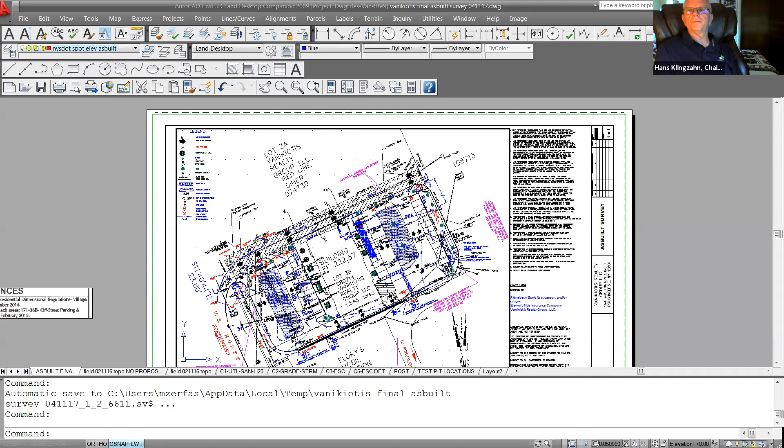Okay, I just had a few questions about the impervious surface. It looks like you're probably going to need a few variances to do this. As the board may recall, both properties had received lot coverage variances as part of their original proposals. And it looks like this is probably increasing some of that because, Joe, you're proposing, I think, 11 parking spaces over on the retail site.

Yes, but we're only adding 700 square feet of impervious surface. Most of the parking is just being proposed where the current parking is, we're just shifting it. We're removing that large walk along the west side of the retail building and making it a smaller, more manageable 5-foot walk. That's just a large area of concrete right now. So by shifting the parking lot east, we could actually even reduce that 700 feet more if we needed to. We just thought in our layout we wanted to keep the maximum separation between the aisles.

Okay, so you are increasing the impervious area slightly then? Yes, 700 square feet. Okay, so we would need a variance to do that because they were already granted a variance. I don't think the lot coverage calculation was on there. So we're going to need to know that information so we know what the variance will be.

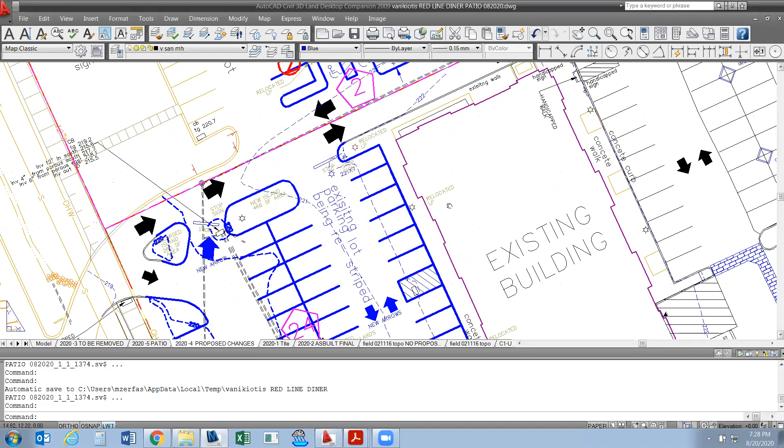So this is the new seating. And where did you say the parking was going? These parking spaces are moving to where, over here? These are the new parking spaces, the 11 that's colored in red. Oh, okay, those are the new spaces. The 24 that's in magenta was shifted to the right, I see, and then creating the 11. Right now, there's a curb line along that.

You'll remember there's a curb line. We're just extending it to the right, and we're adding the parking spaces for the diner over here - the 2, 2, and 2.

Those are done by reclaiming some of the landscaping and just restriping. We're keeping 2 right there, but there's plenty of areas in the back and along the side where we can save that landscaping and move it.

Now we are reclaiming one big area, which is nice, right here in the front. I'm gonna zoom in even bigger. It's called the island, right there at the entrance.

That was previously concrete. We're gonna rip that up and make that a landscape island. So right as you come in, you're gonna see a beautiful landscape island instead of a pile of concrete that's there now. We felt that would be a nice enhancement to the site as you come in off Route 9 - see some flowers.

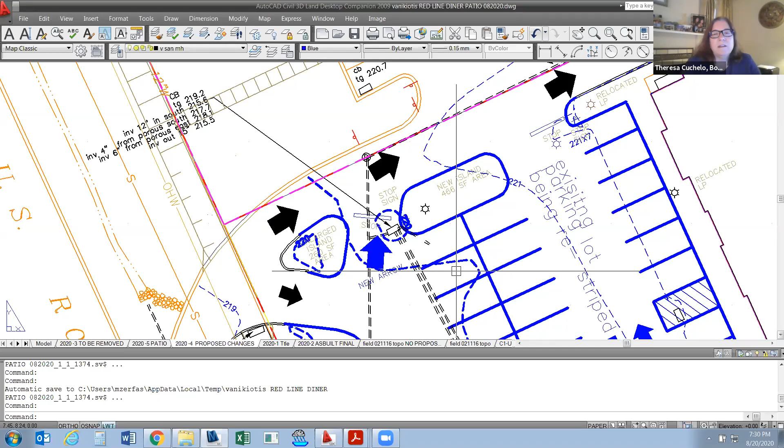Maybe that'll slow people down a bit. Right now it's just dirt laying on top of concrete. I just don't know why it was there, but that's what it was.

Hey Joe, while you have that drawing, would you mind showing them what you're planning on doing with converting the 2-way to 1-way? Where you see the double arrows right there, where the 2 is with the magenta, there's double lanes. That will just become 1 lane.

And right where it says proposed concrete sidewalk, we will install bollards, as the village engineer has suggested, and I agree, to protect the 4-foot walk from the cars.

So now cars will go from west to east through the site coming off Route 9, and they'll have basically 19, 18 feet, because the 20 feet will lose about 2 feet for the bollards - maybe 1 foot for the bollards, but I think I want to be safe and say we have 18 feet for the one-way.

for people to drive through, and we'll put - I'll change this to arrows in one direction only, with a one-way do not enter sign on the other side.

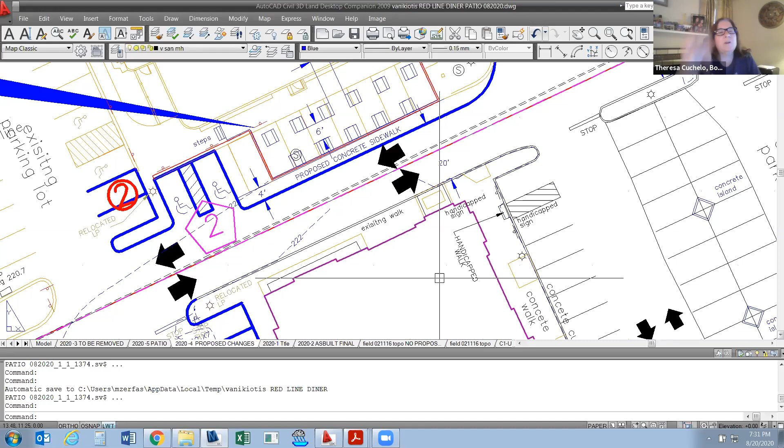Right, so Joe - sorry, let me get my little annotate back. Because then here you'd have to put some kind of... oh no, you wouldn't, because people can go around, never mind. People, as they come in, can turn left or right, north or south

into the two separate parking lots as they need. If they're going to the bank, they continue around. If they are going to the rear parking lots, they travel through, going north or south into the rear parking lots, as they do now.

And as everybody leaves, they drive easterly to the back connector road and go north or south out back to Route 9, because we can't go onto Route 9 from the site anyways, just slip in. So that one-way makes a lot of sense, and it's really not hurting anything.

People coming from the connector road west through that double road - very few people use it. Matter of fact, it's closed right now temporarily for the temporary seating, and it hasn't caused any issues. So that's our proof right there - we have anecdotal proof that closing it for the last couple of months hasn't affected the path.

And we're actually going to improve it from what it is now by providing a west to east flow, which would allow people to either go to the westerly front parking lots or to the rear back parking lots.

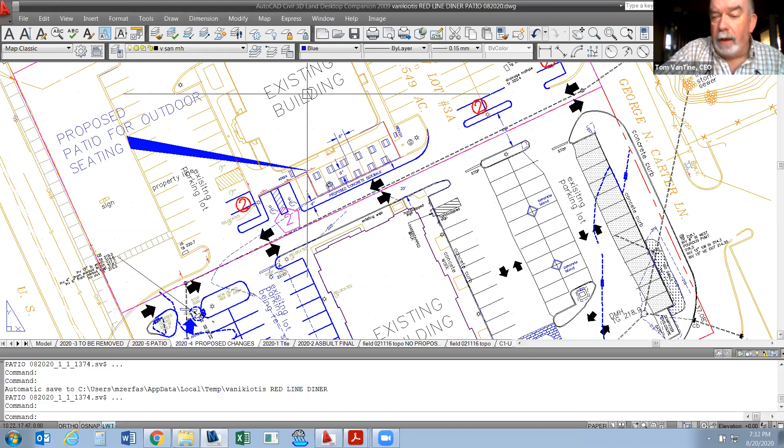Joe, Tom VanTine, go back to the deck for a second. Are you proposing to cover that deck at all? I believe there will be a cover - I'll verify that, and we need to get you information on that.

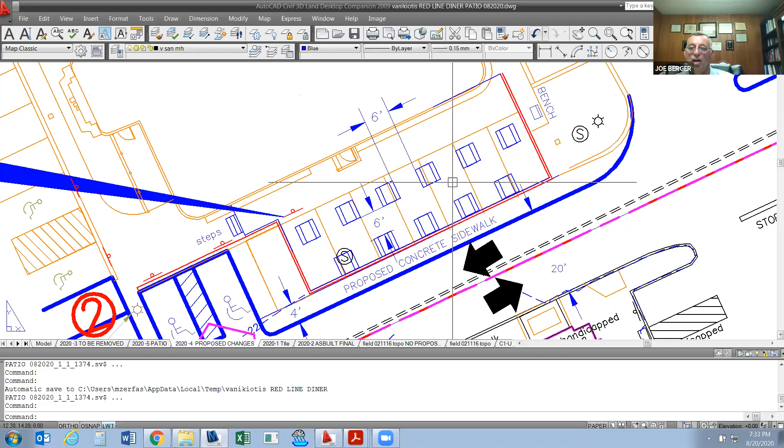Also, what do you anticipate doing as far as water runoff and ice runoff in the wintertime? It will drain down across the sidewalk onto the driveway, and then from there, it's grading - just as it does now - it flows westerly to a catch basin.

I'll just zoom into where that catch basin is. It goes to this catch basin right here - that's where it currently drains. Right now you have it coming down a roof drain, obviously, into the catch basin. We're going to have a free flow off a cover going onto either the walkway or the driveway.

Okay, my concern is in the wintertime when it freezes. Let me think on that - maybe we could collect it and do something. I'll work with you on that. That's a very good concern. I can't give you an exact answer, but we'll solve that problem. How's that? Okay, very good.

Thank you, Joe, it's Victoria speaking. The site plan that we got was fuzzy - the copy was a little bit fuzzy. I wonder why. I mean, I can show you, but the digital copy I received was fuzzy too.

So can you just go over the parking? Is there adequate parking on both lots now? Yeah, the current parking meets code, we're just asking for a few more. Realistically we need a little bit more, but it meets the code. Even with the additional seats? With the additional seats, well, we don't think so, yeah.

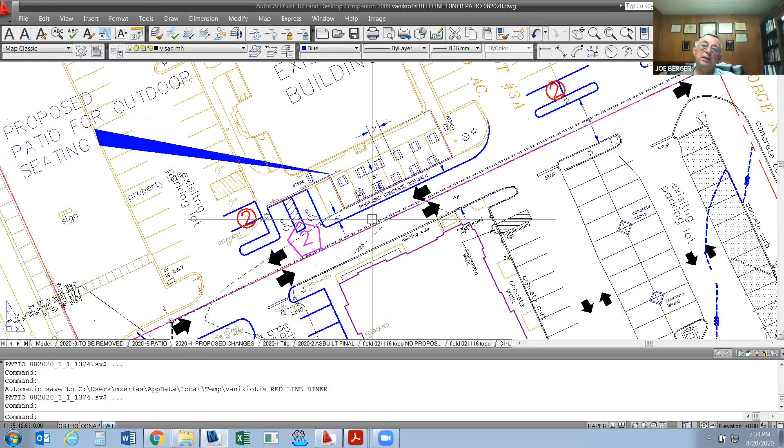Well, something to think about for that. I'll look at that. I think what we're not planning on is having everything inside - this is more outside where people will sit. But I understand the question and I'll address it.

Yes, thank you. I have a question - this is Suzanne, board member. I see steps on the plan for the deck. Is there actually going to be some type of ramp as well for wheelchair accessibility, besides just going inside the building and coming out? That's the only way - you'll go into the building and out through it so we don't lose... all we have is steps from the outside. But we feel we'll allow, just as it does now, the ramp up into the building and out through the one doorway. Okay, that's our proposal.

Will there also be - one other question - is there going to be any permanent light fixtures in the future, or is it just going to be like outdoor lighting, street lighting? Just a street light, there's no proposal right now, but I'll verify with my client. Okay, thank you. Let me write that down so I do not forget it.

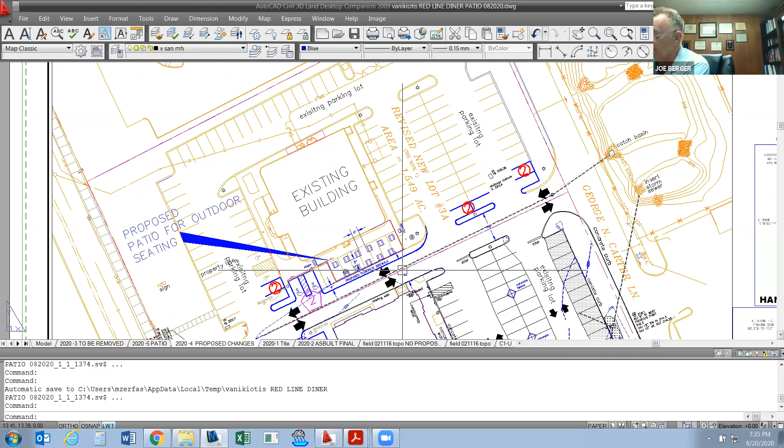Verify lighting, okay, and the drainage and parking. Joe, as far as the cover goes over that, considering this is basically seasonal outdoor seating, would this be like a canvas cover, or are you throwing a hard cover, sort of a metal or a roof type cover on this? I will verify. I think it's going - I don't want to say exactly, I thought it was going to be cloth, but I will verify with the client and get the information over to you if possible.

Okay, does any other board member have any comments or questions? No comment, this is Suzanne. No comment, Raylene. I have no comments, this is Steve. I have no comment, it's Teresa. Okay, no further comments then.

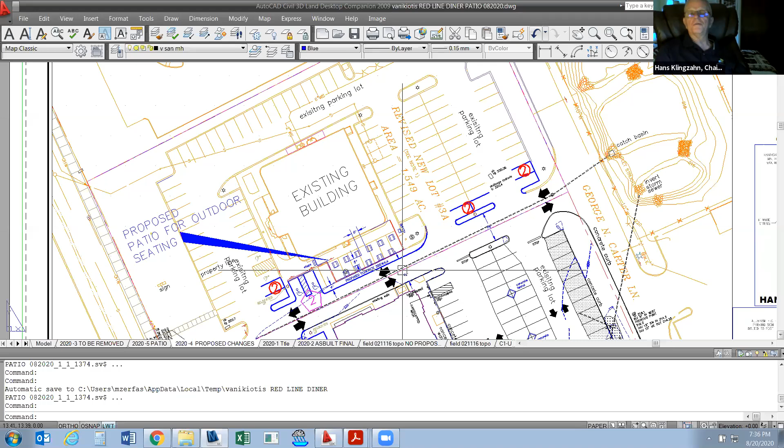You gonna have everything ready for next month's meeting? That's my plan. I do have a question for the planner, if I may. Go ahead, sure. One of the things we did, and I'm not sure we need it, was extending the parking impervious where I showed. I don't know if I really need that.

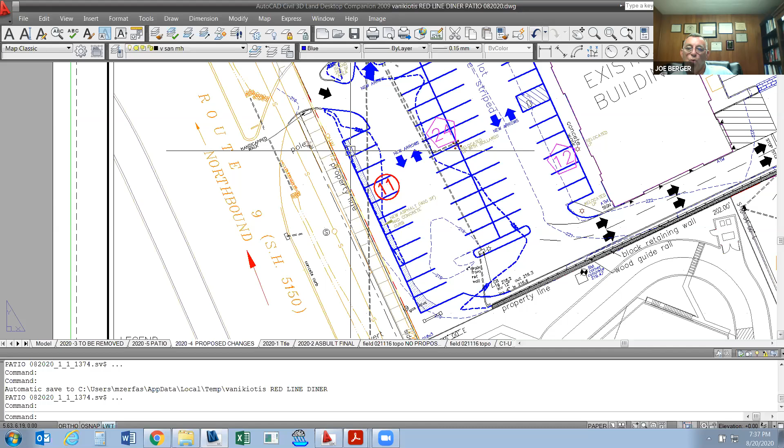I could probably squeeze that in to get rid of that, which would get rid of the impervious variance. But would the variance - you said there was also a variance because the parking is in that location? So what we have, the impervious calculations - I can tell you from their previous site plan approval what they were granted as their impervious variance. I don't have that in front of me, but I can get that to you. Okay, thank you.

There's also in the code that if greater than 50% of the front yard is used for driveway and off-street parking, they need a variance for that. They did receive a variance for that as well. I don't know the exact number - 74.8%. Oh, well, there you go.

Victoria, on his plan - but if I don't increase that paving there and keep the current curb line the same, just restripe it for parking, would that not need a variance at that point? Correct, because they have approved parking right now and approved impervious surface. So if you can stay within that, then we do not need variances. Okay, gotcha, so that's something for me to look at - if I can get rid of that impervious, which will help the job altogether too. Yes.

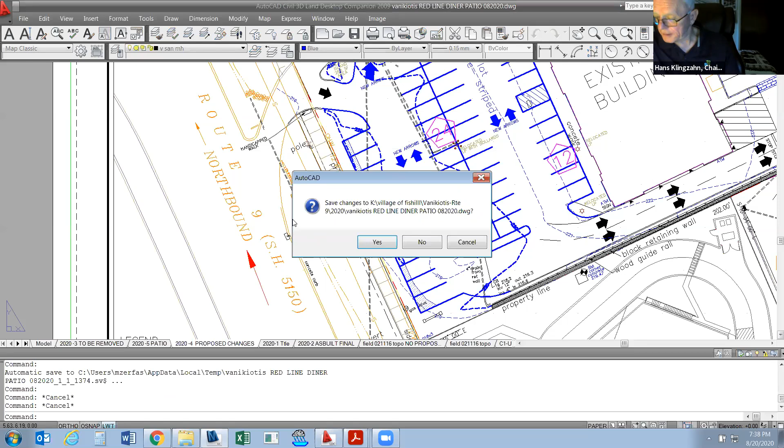Next item on the agenda is Wesley Center, 953 to 961 Main Street, plan review. At this time, I'll read a little memo here.

Thank you, everyone, for attending tonight's meeting. As you know, this board held a public comment session on SEQR impact at our July 23rd, 2020 Planning Board meeting and accepted written comments until the close of business on July 28th. The board has considered everyone's comments as well as the materials provided by the applicant. There will be no opportunity for public comment this evening. As the project moves through the review process, we will need to schedule a public hearing on the site plan. The zoning board will need to schedule a hearing on the requested variance, and the village board will need to schedule a hearing on the proposed zoning amendments. All hearings will be publicly noticed.

Thank you very much. Will the applicant please come on board?

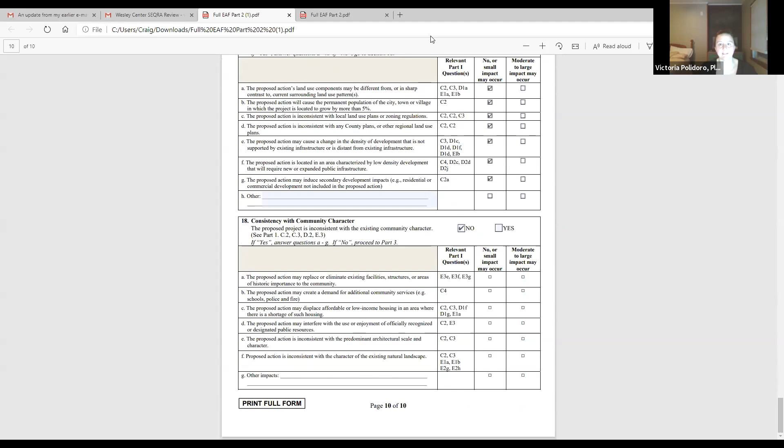So that's part 2. I'm going to pull up the neg dec for a moment so we can go through that. Let's see.

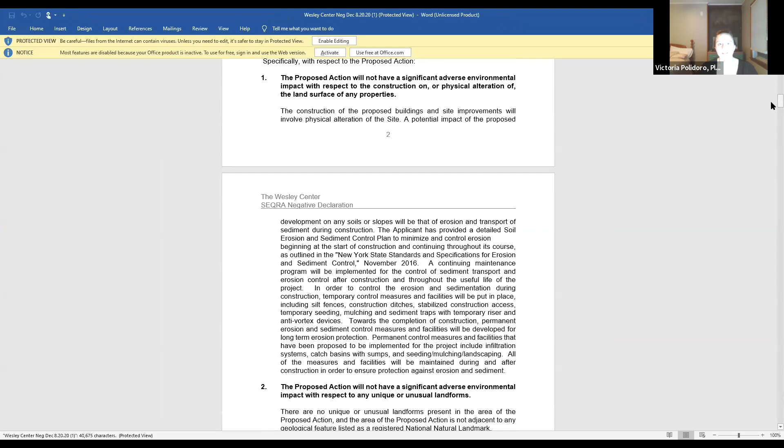Okay, so this document, we went through the highlight reel when we went through part 2 of the EAF. This would be the negative declaration. This goes through each of the items that we just discussed: alteration to land, alteration to surface water, groundwater, and it goes into detail and provides the detailed evaluation under each of those points, supporting the answers in part 2 of the EAF. All the board members have received copies of this previously, and you were all able to review it prior to the meeting.

So I don't think we need to read it word for word. It's very long, you all have it. It'll be part of the record unless there's anything you want to discuss or any changes you want to make to it.

Okay, any other board members have comments at this time? Raylene, no. Hi, it's Teresa, I do not. Hi, it's Suzanne, and I have no comment. Steve, this is Steve, I have no further questions or comments.

Okay then, what's our next step, Victoria? So then we have prepared a resolution adopting a determination of significance, a negative declaration.

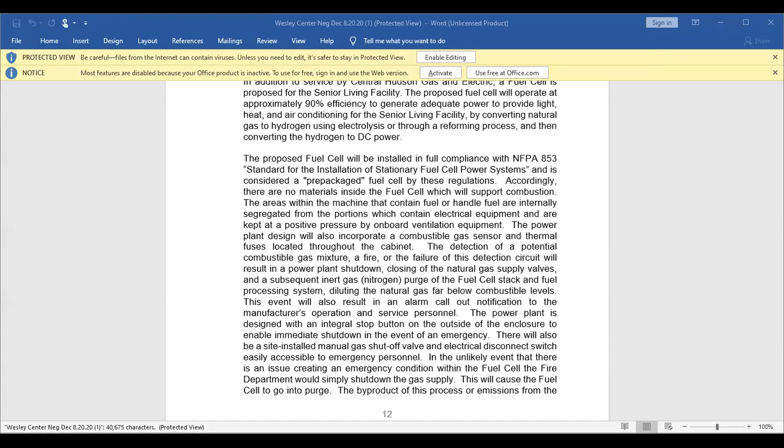So you would need a motion to adopt. Any questions at this time? Hans, it's Teresa, I do not. Raylene, I do not. Suzanne, I do not have any further questions. This is Steve, I have no questions.

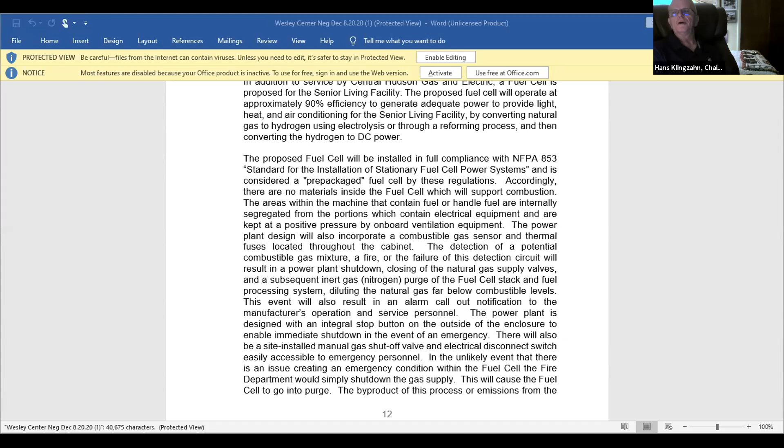I left somebody out here. I'm sorry about it. Tom, did you have any comments at all during this whole procedure? Tom, I'm sorry, you hung up on me. No. Repeat that? Tom, I'm sorry I left you out before. Did you have any comments or questions? I do not, Tom, I do not. You do not? No. You're satisfied then?

I am, yes. Okay, that being said, I'll entertain a motion that we adopt the negative dec on this project. Do I have a motion?

Hi, Hans, it's Teresa. I move to accept the resolution for adopting a negative declaration for the Wesley Center site. Do I have a second? I second, Hans, Suzanne Spezialy. I have a motion and a second on the floor. Will the secretary take a roll call ballot, please? Hans, yes. Teresa, yes. Raylene, yes. Steve, yes. Suzanne, yes. Carried.

Okay, this phase of this project comes to a close. The next phase would be they would have to go before the village board, is that correct, Victoria? Yes, they need approvals from the zoning board of appeals and the village board. So they're welcome to come back before this board for workshop meetings, but this board will not be able to grant any approvals until such time as the other boards take action.